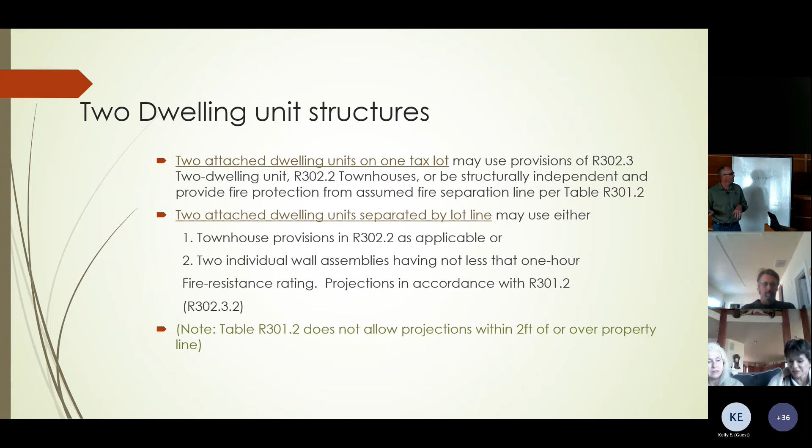So 3 or more units that are attached. The only way you're going to stay in the residential code with that is to do townhouses. Once you get to 3 attached units, that pushes you into commercial code. So in townhouses, you can go as many as you want. You just have to meet the provisions of R302.2 about vertical separation and separation of utilities and things like that we'll talk about a little bit later.

For that, so 4 or more units. This is the only thing that comes into play on that is that you'll have to do accessibility requirements, and that doesn't really matter if you're in the commercial code or the residential. If you have 4 or more attached, the residential will push you to the commercial for the accessibility. You've probably seen some houses being built that are like 4 townhouses in a row, and they're not meeting accessibility, and that's because one of the exceptions is if it's 2-story, that they don't have to meet accessibility. So that covers that.

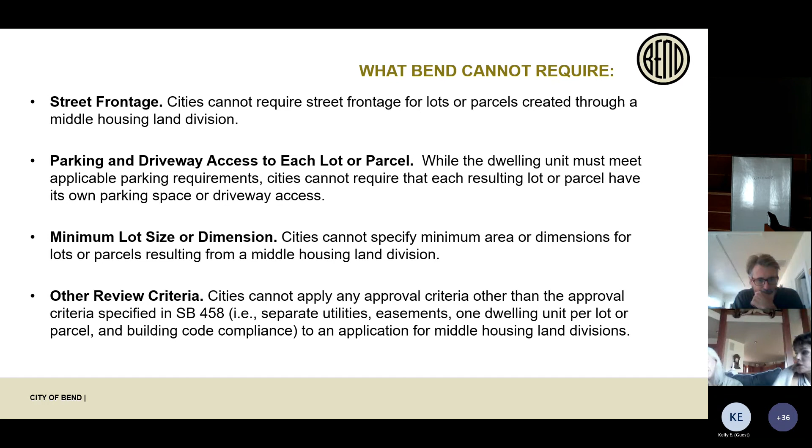One thing I just want to bring to your attention, I've been working with Brad, Jay, and Joe on this. So when you come in for the Senate Bill 458 application, you have to demonstrate that the building meets all applicable Oregon Residential Specialty Code and building codes. We originally put in that it had to be prepared by a design professional licensed in the state of Oregon to submit this letter. In a lot of cases, it doesn't need to be provided by that design professional.

Sure. Yep. Oh, so go back 1, and it's yours, Brad. Thank you, Pauline. Is that my next slide? Yep. Okay. Right.

So the very beginning of 302 talks about the fire resistant construction. That's kind of the basis of this presentation. So there is a table that tells you that you have to be 3 feet from the fire separation line. And that fire separation line can either be an actual lot line or it can be a chosen one, whatever works best for a project.

Jumping all over. So let me see, I'll just read what it says. Where multiple detached dwellings are located on a single lot, each detached dwelling shall independently comply with 302.1. So that's just part of the slides that I'll show later.

You can have a big lot with a bunch of different dwellings on it, and they get looked at individually for building code. For planning code, you have a certain number of lots or a certain number of buildings you can put on that lot. But for us, we look at each individual structure. So if it's attached, then you count up the number of dwelling units, and that will drive you to what code you have to go to.

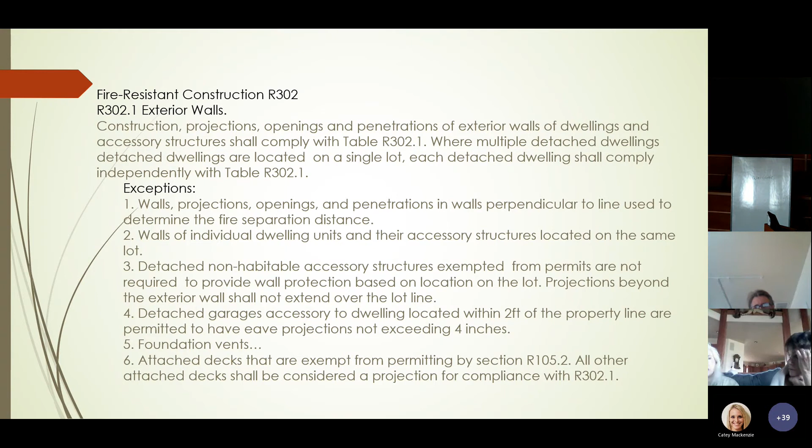Okay. So next one. So this is table R302.1. If you look over on the far right there, fire separation distance provided. People will confuse this with how far it is between structures, and that's not what it is. It's how far it is to the fire separation distance line. There's a definition coming later of what that is.

But if you are less than 3 feet from that, and that's typically going to be a line between 2 structures. So to not have to have any fire rating, you need to be 6 feet away from each other, because that line is going to be in the middle of the 2. So if you're less than 3 feet to that line that you determine, then you need a 1-hour wall. And same with openings, and an opening is your doors, windows, vents, all those things in the wall. It says not allowed less than 3 feet.

So penetration, same thing, not allowed less than 3 feet, or it needs to comply, which is going to be fire stopping or a fire assembly. And projections, this one is a pretty common one that we run into. If you're going off of this table, which is basically everything other than a townhouse, as close as you can get to that line is 2 feet. You're not supposed to project anything closer than that.

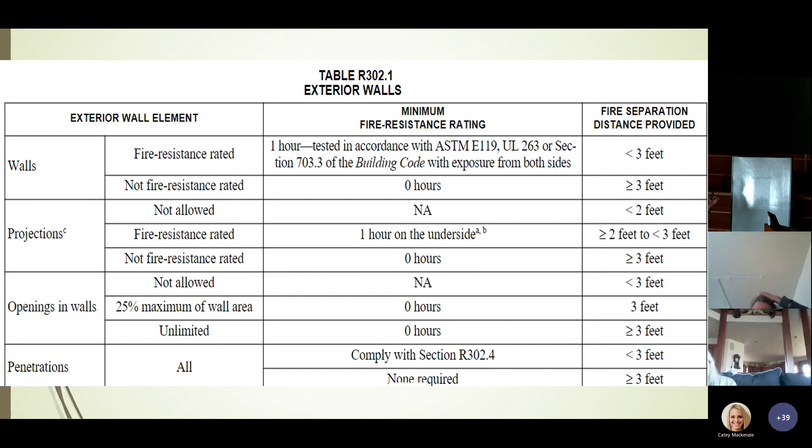The new code did specify that decks that are over 30 inches above grade are also considered projections. So this is something you might run into if you have a 5-foot setback from the property line, and you build a 3-foot wide stairway deck on the side of the building going down. That's going to now be within 3 feet of the property line. So it would need to be fire rated.

Well, no, if you build it 3 feet wide and you have a 5-foot setback, you're at the 2-foot line, so you should be fine. But if you're doing a 3-foot setback, which the new code will allow, then you're going to be right up to the property line with a deck. So that would need to be 1-hour rated, which is like heavy timber or I think non-combustible and a 1-hour firewall inside of it.

If it's below 30 inches, it falls under the exemption of just being a landing outside. The exception says that it's not considered a projection. So then you could go right up to the property line with a deck that's a foot or 2 off the ground.

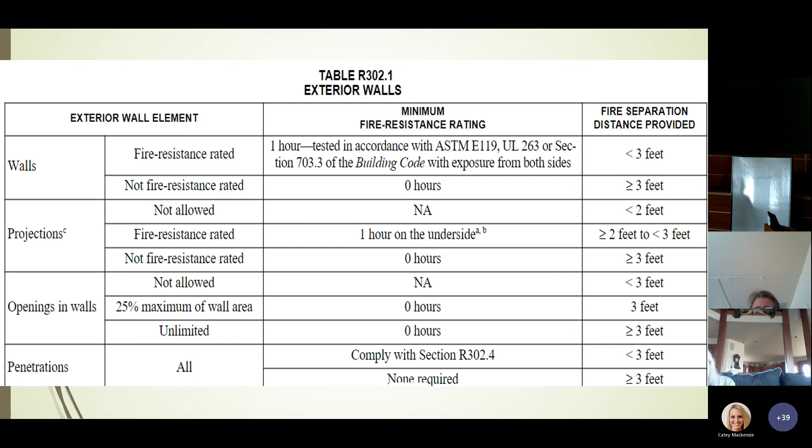Oh, you got it. So fire separation distance, that was the column at the end that I was talking about. The code definition in Chapter 2 of the residential code gives you these three options for what that distance is. It's either to the lot line, which will be if you're doing 458, you're drawing a new lot line at some point, so it's to that line. Or to the center line of the street, alley, or public way, which usually doesn't come into effect much with fire rating for the building department; front setbacks to streets are more a planning code issue.

And then the third one that we see a lot is the imaginary line between two buildings on a lot. But it's really between all detached buildings on the lot. You need to determine where you want this imaginary line. So if you have two buildings that are 3 foot away from each other, you can put that line right on the face of one of the buildings, and that one just has to be fire rated. And then the other one is now 3 feet away, so it can meet the normal code of having an eave and not being fire rated.

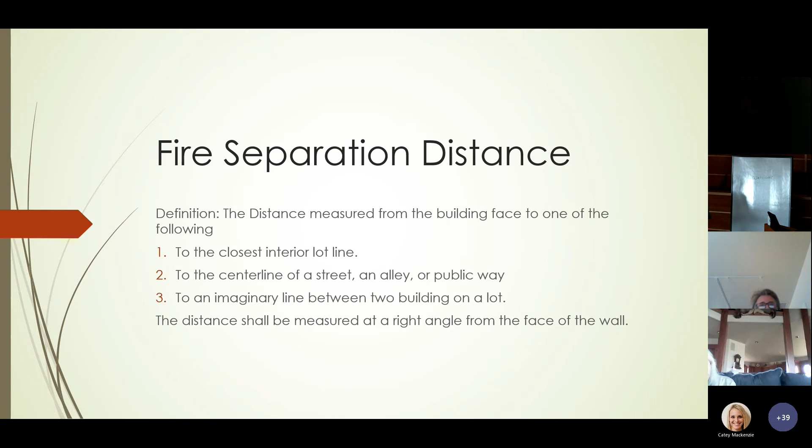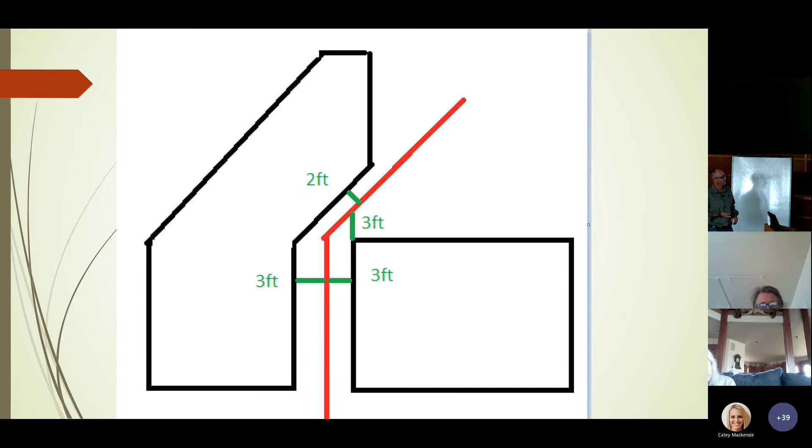So in this picture, you can see that this building is 3 feet from that line, so it doesn't need to be fire rated. This wall is 3 feet, so it doesn't need to be fire rated, but this one is 2 foot, so it would need to be a 1 hour wall, and it can't have any projections. Actually, on the 3 foot, the eaves can go in. That's what I mean by the projections.

Yeah, so if you're at 3 feet, then you can go within 2 foot of the fire separation distance. So that gives you 1 foot of eave. Yeah, if you had a 4 foot setback, you could go 2 foot eave. Basically, house with 1 foot eave, house with 4 feet. 1 foot. Yeah. Right. Yeah.

Okay, so this was just kind of my picture, and we actually just had something very similar to this submitted, which is kind of becoming an infrastructure question of how to do the inspections and whatnot, because you have to get utilities to each of these buildings without crossing each other. But if this is one tax lot, building is going to look at each of those structures individually. So I don't know if I say anything else.

Yeah. So we look at each building's fire separation distance to the other buildings. So a person could do that many duplexes, like if those are duplexes, all those buildings could still stay in the residential code even if it's on one lot. This is the flyer, the handout that's on the table if anybody wants, but it was meant to be just kind of a quick reference of what you can do.

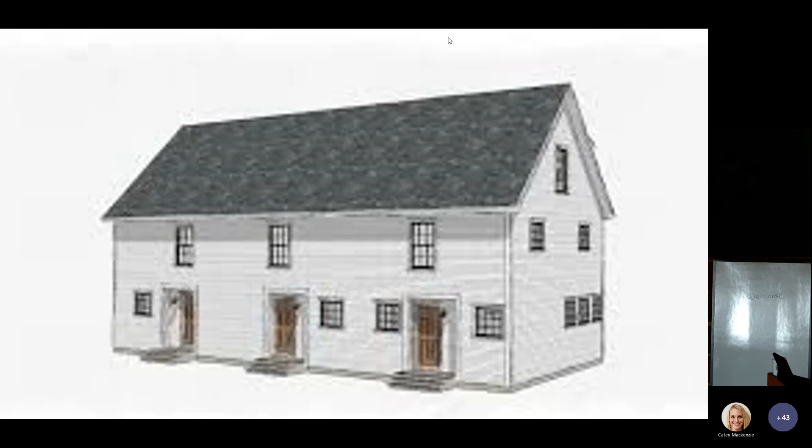So you can do a townhouse because they're connected, and the townhouse code allows you to have 12-inch eaves. And the 12-inch eaves can project over the property line too. So in this situation, if there's no property line here, this is just a duplex, and all those eaves don't matter.

So we did make a determination that in this kind of case, that little corridor you see in there, if those walls are within 6 feet of each other, we want to call that 1 hour walls. Because the intent of the code is that you don't have windows and stuff looking right at each other and fire being able to jump through there with no firewall. So hope that's somewhat clear.

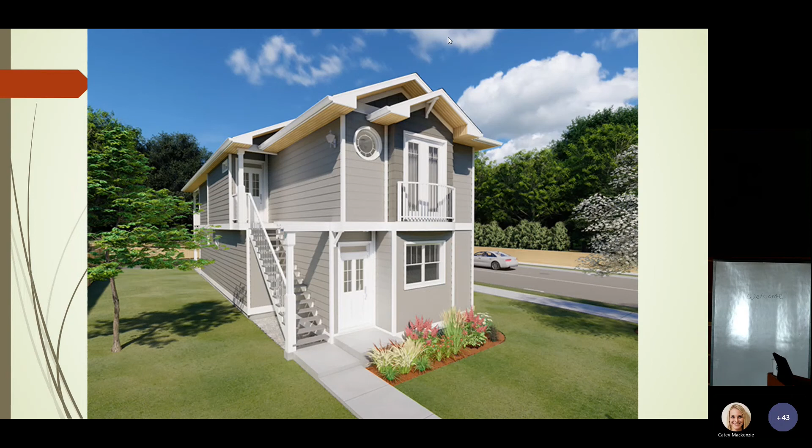Next one. Okay, so this is one dwelling unit above another dwelling unit. So what happens in this case is you can't use townhouse code because it needs to be vertical. And it's not 458 eligible because you're not going to be able to get one dwelling unit on the property line in this case, since they're on top of each other. So the only way to do this one is duplex. And a duplex requires a 1 hour floor ceiling assembly, and then all supporting walls of that assembly also need to be 1 hour.

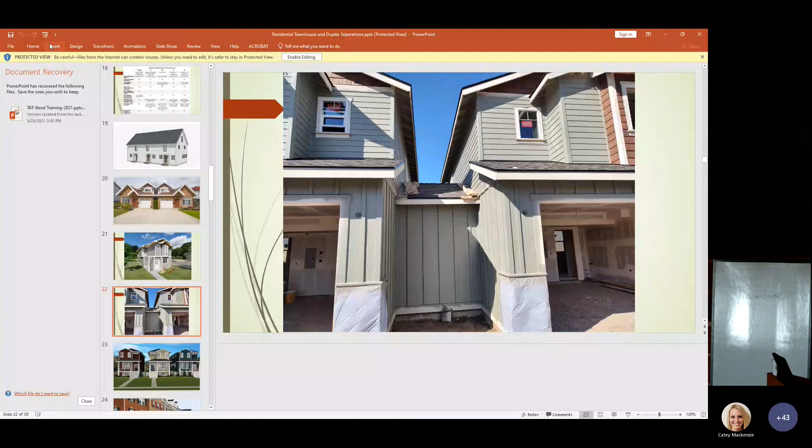And you get windows on the... Great. Got one more question. If you didn't hear that, what he said was, since those walls are 6 foot apart from each other up there, you can have windows all along and have as many openings and things and no rated protections and all that.

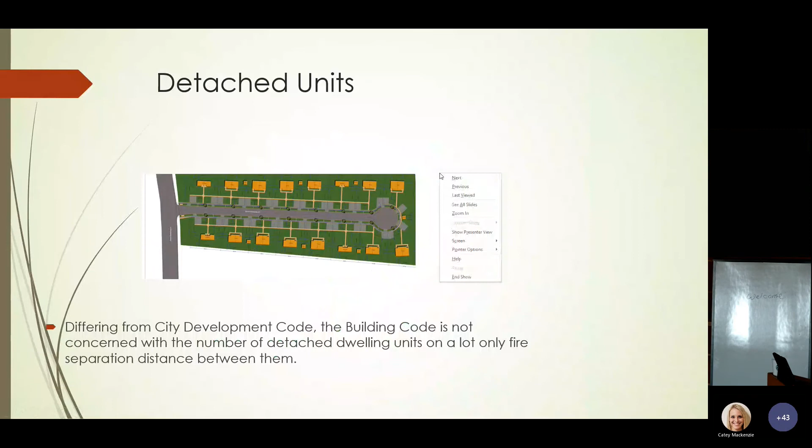Sure. Go back on the slide. I don't want to get off topic, but on the left side of this wall. This little guy here? No, you don't. So there's a definition in there of extending to the exterior wall for duplexes for two unit separation.

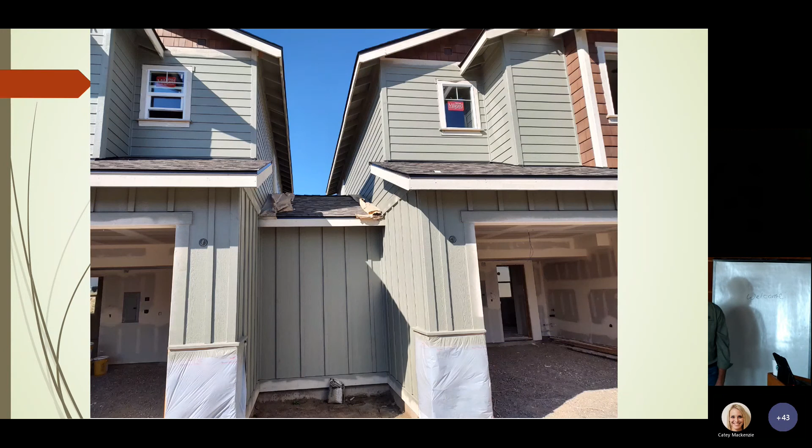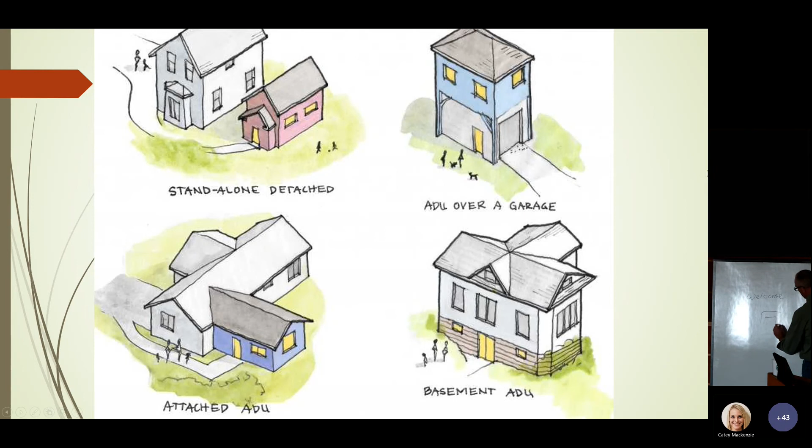So if you had a garage and you've got an ADU above, you're saying, or you just draw it sideways. Figure out that. So this is the garage. There's a door. And this is all one unit. And then there's a unit here. So this is one, and this is two. And so this unit, you get into it from outside. And in this unit, you come into your garage, you go into your house, you walk up into your bedroom. So then all of this has to be rated, right?

Like those. Is this 1 story? It's 2 stories. Okay. Oh, this is the face view of... This is the side, yeah. Okay. Gotcha. Yeah. I'm trying to get some specific questions. It's much easier in this. That? Okay. Yeah, there's a door there or something.

So you need a garage dwelling separation, which is just gypsum on both sides. The ADU, I guess you're getting to it from the outside. So you need a 1 hour wall here between the dwelling, and you also need a 1 hour wall there, or 1 hour floor ceiling assembly. And then the walls supporting that need to be 1 hour rated. Put a door, ADU, second floor between ADU and the dwelling, you can put a door. Yes.

If we run out of questions, I can go back to the presentation. Oh, we lost the whole thing. Do we want to take a break? Yeah, let's take a 10-minute break just to get the thing going again, and we'll see you in a few. All right, hopefully everybody online can hear us. We were getting some online questions too. I think I'd like to keep doing the presentation until 11, and then leave the last hour for questions and online questions. So I will start this up again. We're not taking questions, so Pauline doesn't have to be here.

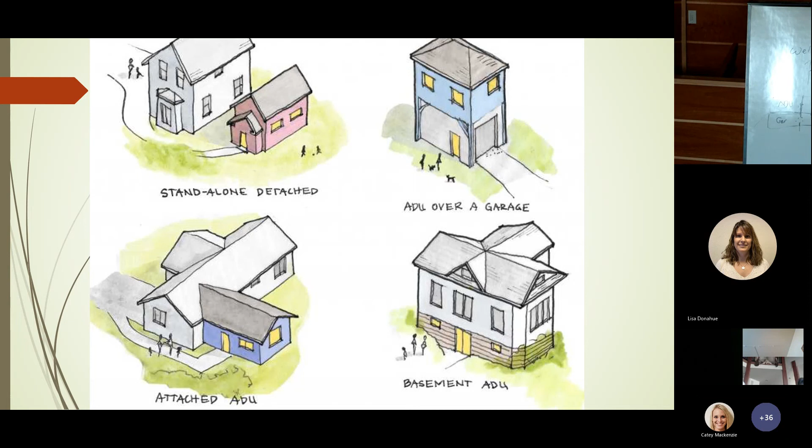Two-family dwelling separations, which also apply to ADUs and duplexes, if the ADU is attached. What it says a two-family dwelling needs is a 1-hour wall, tested under those 3 different options of approvals for that type of wall.

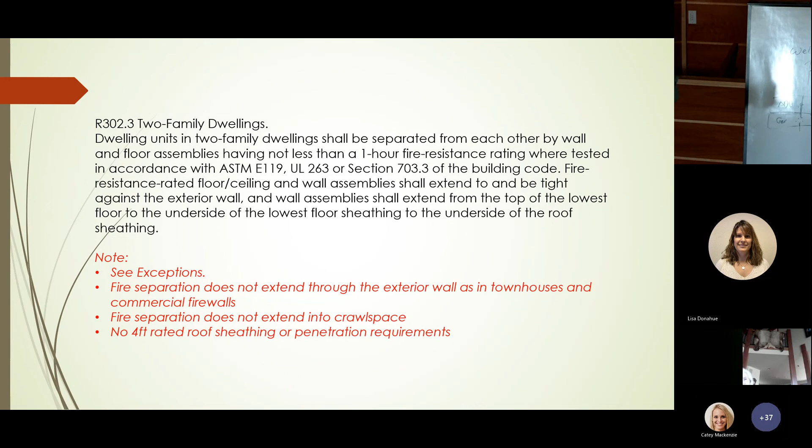And there are no wrap back requirements on 2 family dwellings, and these are in townhouses. On the walls, that's commercial code typically. By wrap back, I mean the wall perpendicular to the property line doesn't have any requirements on it. And no 4-foot rated sheathing. That's what you'll see in commercial code and in townhouses: the no penetrations and the fire rated sheathing for 4 feet back from the property line.

So this is a typical 2 family dwelling unit separation. The red line is the 1 hour rating. And you'll see that it doesn't go through the crawl space. This is the definition from 2 slides back. It says that the 1 hour separation between the dwelling units needs to extend from the lowest floor to the roof sheathing. So in this situation, I tried to draw a post and beam floor, so you wouldn't need to continue that down and have a footing and all that on a 2 family dwelling ADU situation.

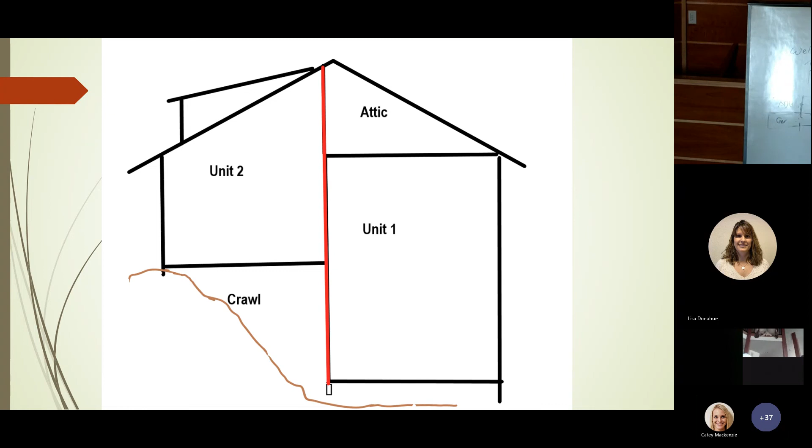And then the crawl space wall doesn't need to be rated, if that makes sense. And then the attic wall. So unit 2, between itself and the attic of unit 1, still needs the 1 hour wall. These are the two exceptions to the 1 hour walls. Exception 1 is fire sprinkler, that you can knock it down to a half-hour rated wall. Exception 2 says if you have a layer of 5/8 gypsum across the whole top floor, all you need between them is draft stop in the attic.

And I actually, just putting this presentation together, realized they changed the draft stopping requirements in this last code. Now it's down to only 2 options, which is plywood or gypsum. It does say or equivalent, but they used to spec out a whole bunch of things like mineral wool insulation, and I think metal, but now they just say those 2. So this is that situation. Again, it doesn't have to go through the crawl space.

The wall between the 2 still needs to be a 1 hour wall, but now all you need on that lid is 5/8 type X gypsum. The arrows are going to start popping up as you go forward. So the next one, that lid just needs to be 5/8 type X gypsum, and then the next one is the draft stopping. I don't have it in front of me. I think it's 3/8 gypsum or 1/2 inch plywood, or it might be the reverse of that. But if you stick with 1/2 inch, either gyp or plywood, that meets it.

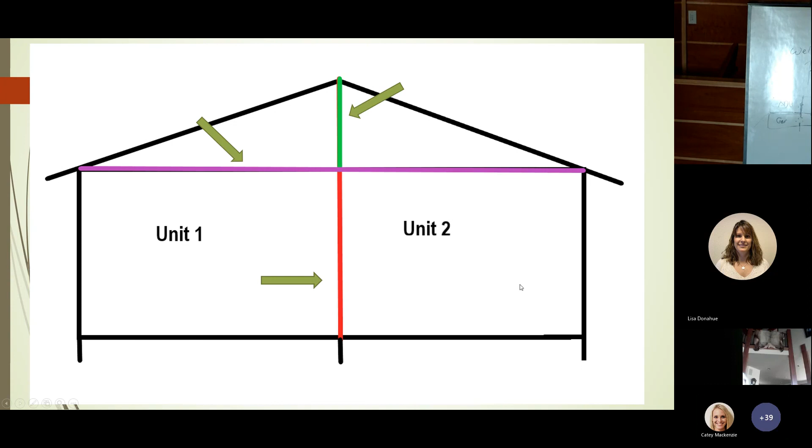So supporting construction, this is the next section. So if the separation is a stacked unit and you have a 1 hour floor ceiling assembly, then the supporting structure can't be any less than the 1 hour. And there's some question as to, like if it's an exterior wall that's not the bearing wall, but that's still supporting that diaphragm. So if it's an interior non-bearing wall down below, like if you had garages separated with a non-bearing wall in between them, that doesn't need to be 1 hour rated.

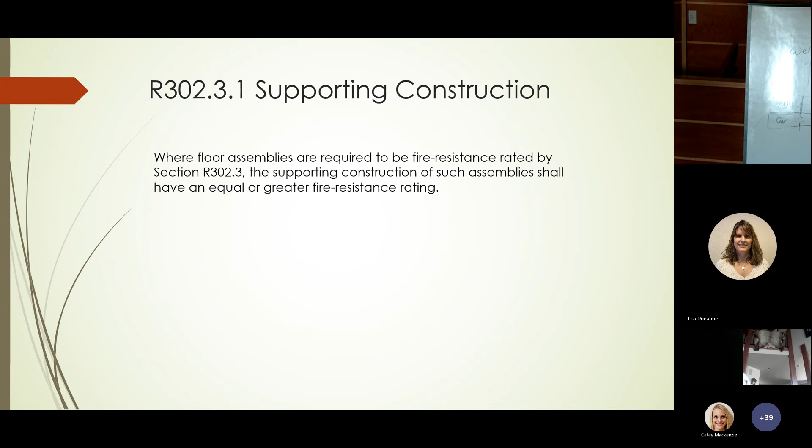So this is section 302.6, which talks about the separation between the garage and the dwelling, which is very confusing to people that have a garage and are putting the ADU above. The ADU kind of supersedes this section, which just says that you need 5/8 on the lid if there's habitable space above the garage. So I don't think we're going to worry about having it on the lid if you have that 1 hour separation from the dwelling above.

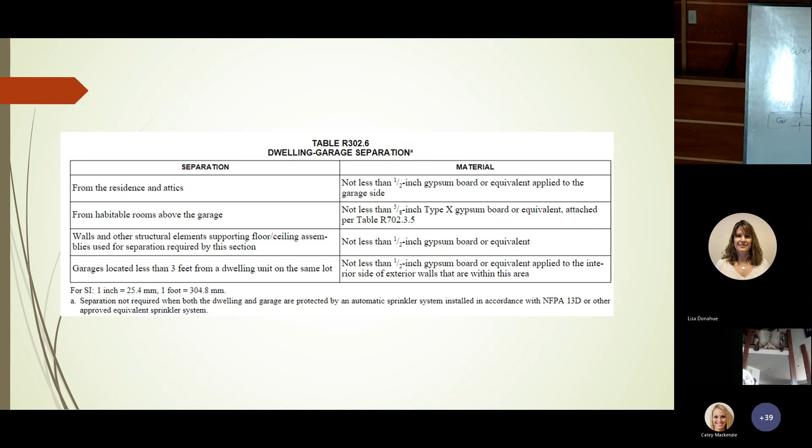So townhouse separations. We can go to the next slide. So there are 4 types of firewalls allowed to separate townhouses. The two 1-hour fire resistant walls are two distinct firewalls, which typically is going to be 4 layers of gypsum with 2 stud walls. And to build that, you usually lay it down and have the inspection come out and see the inside layers built, and then they'll tip that up and build the house, do all the MEPs and the other parts of the construction, and then do the other firewall side.

So it tends to be a slower process, and there are penetration requirements, well, I don't think they're as bad for that one, but we just don't see this type of firewall as often in townhouses these days because of the construction feasibility of it.

A modified 2-hour firewall, this is the wall that's shared by both sides of the townhouse. It's not structurally independent. And they say plumbing's not allowed, but then in a later section of this code, they did clear it up and said, unless you use the provisions of 302.4.2.1, where you're framing out the plumbing in the wall with another layer of gypsum. So it kind of fire blocks it. Oh, that's what I was going to talk about.

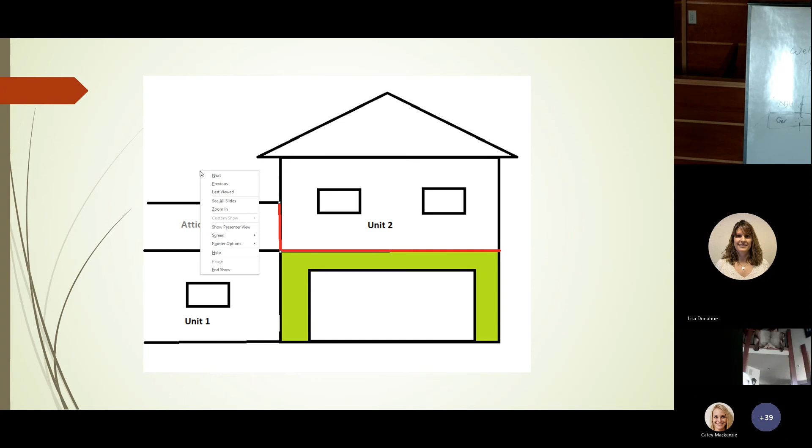But if you have these bigger houses that do open web trusses, they may have a communicating space in the floor cavity that's over 1,000 square feet, and then you'll need draft stopping in there. But it's not as restrictive as fire blocking. So, thank you. We can go to the next one.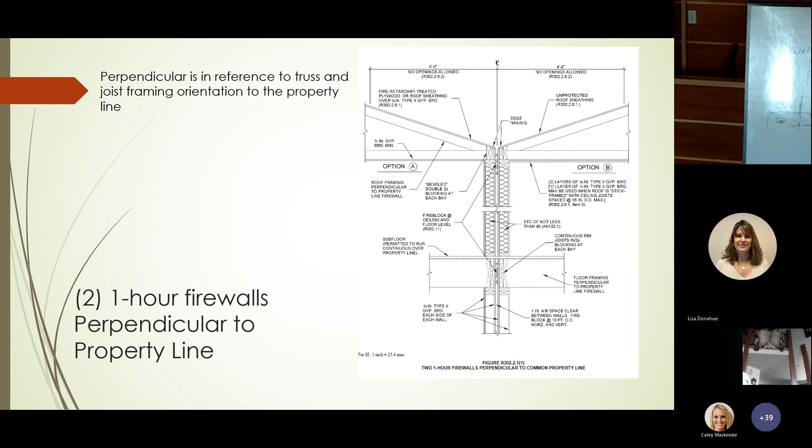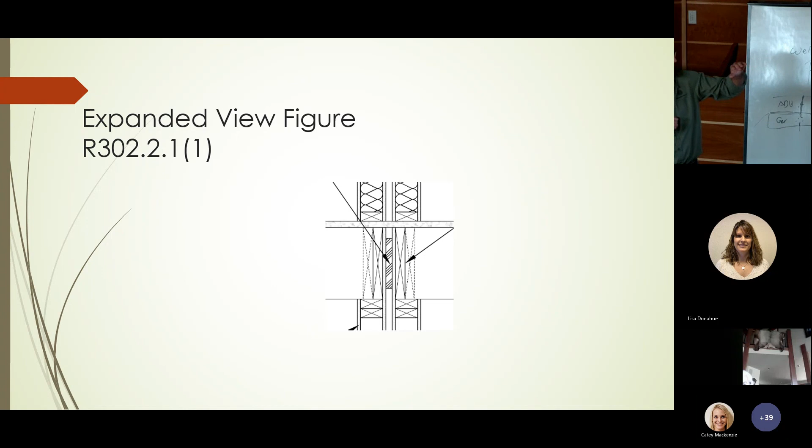Yeah. So you can see the 2 layers of gyp running up the inside face there. You are allowed to go across the top of it with plywood. And then they show fire blocking in there, but if you went across the top of it with plywood, you wouldn't have to do that. So next slide.

Oh, this is the parallel. So now the trusses and joists are parallel to the property line. Same thing, it's 2 1-hour walls. You can see how the firewall goes up through the attic there. There's 4 layers total of 5/8 gyp.

I did ask the state about this. That's why I redlined the slide, because they messed up and said it was 1/2 inch, and that didn't really make sense. So I asked them what the intent was there, and they said they're going to come out with an addendum that's 5/8. So basically, there's 4 layers of 5/8 in the wall framing, and the same thing in the attic.

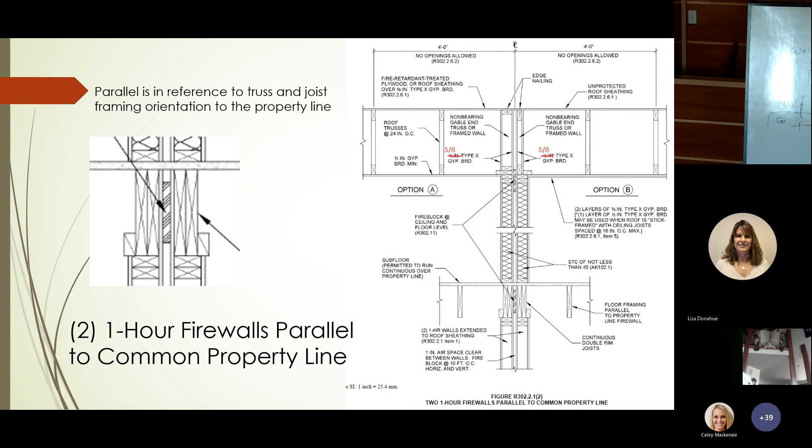And then the blow up there of the floor framing, I think that's the same. It's 2 layers of 5/8 on the inside, and then 4 blocks total. So that gets you 2 1-hour walls, basically. Next one. I should talk about the fire rated sheathing too. It's the same on this one as the other 2.

So if you look at the top there, the one on the left says no openings allowed, fire retardant sheathing, and that's for the first 4 feet measured that way. So it's not technically 4 foot of plywood, which we do see, but people don't typically build with the truss perpendicular anyways. The 4 foot is measured from the property line, not along the sheathing of the roof. So the left one, option A, is fire retardant sheathing and no openings for the first 4 feet, and the lid of the ceiling is just regular 1/2 inch gyp.

The other option is to go 2 layers of 5/8 across the whole lid of the building, and then you don't have to have fire rated sheathing, but still no openings allowed in that first 4 feet.

And then also this is the modified 2-hour wall. So that's the other type of wall. And on this one, you can see that, and this one is pretty popular, but it is a lot more difficult to build. And the reason why is they always put the gypsum on last on this, after everything's framed, and it makes it difficult to extend it through the floor framing.

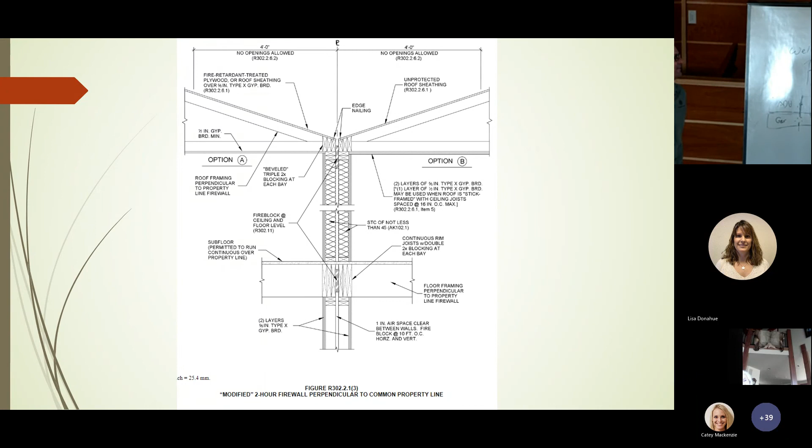Oh, this is the 6 layers, and since they don't have the gypsum layer running up the inside like the two 1-hour firewalls, and the fact that the fire rating comes from those 2 on the exterior, you don't have that inside the stud bay. So you could, in this situation, frame up a stud wall, a small cripple wall, and then put 2 layers, which would be just kind of extending your firewall up through, or you're going to need to do 3 layers on each side of solid blocking.

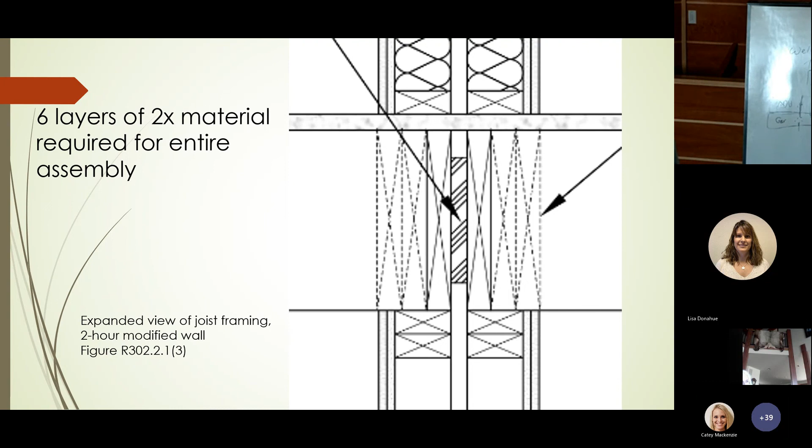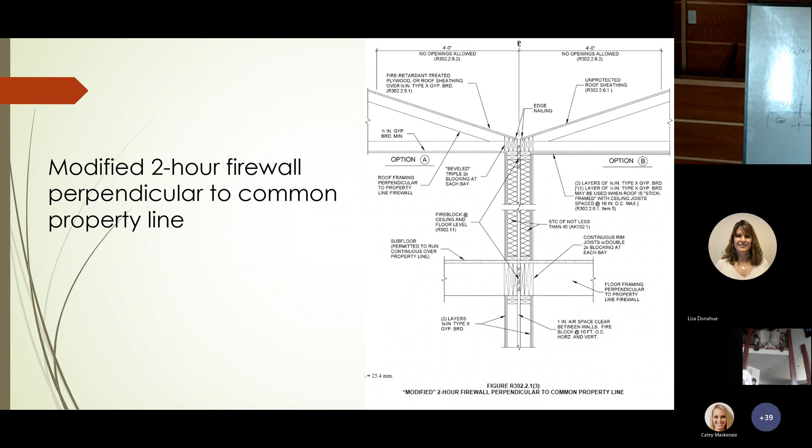Next one. This is, it's the same, isn't it? Perpendicular. Now let's go to the next one. Yeah, here we go. Parallel. So this one's pretty common. This one you can see where the 2 layers go up through the attic on each side. No requirements on the lid if you're using option A.

You can still use the same option B of doing the whole lid of that story in 2 layers of 5/8 gyp, and then you don't have to have fire rated roof sheathing. And same thing, no openings allowed. So that's going to be your roof jacks, your ridge vent. That's the one we see all the time is ridge vent. You're ridge venting a house, so you do it all the way across, but you can't do it within 4 feet because that's an opening in the roof.

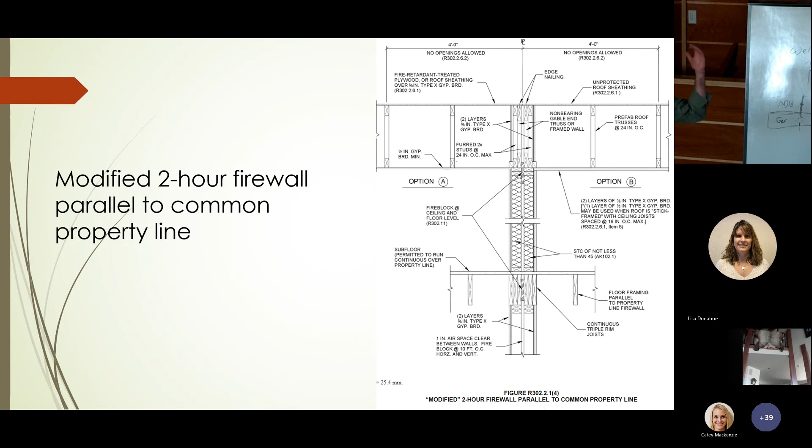The one thing to consider, especially if you're going to jam townhouses close together and then use ridge vent, is that you're probably not going to get enough ventilation because you have to cut it off 4 feet from the walls. So you're going to want like eave vents and possibly mushroom vents or something up near the top to get the required ventilation.

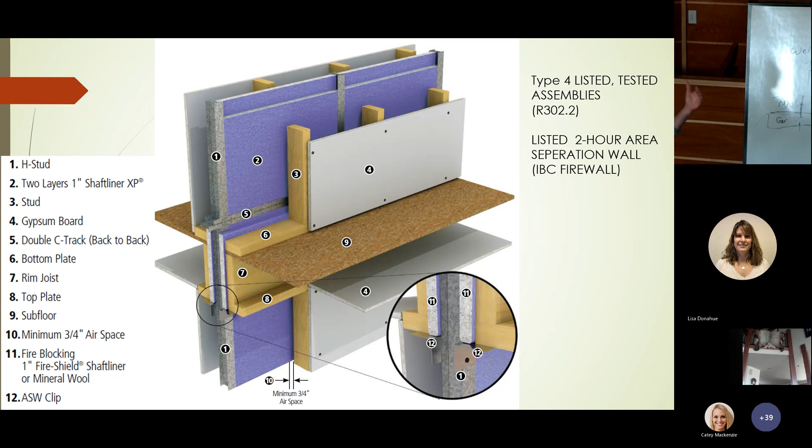But once you get it down, I think it goes a lot faster because it doesn't have the issues of the inspector coming in and saying, oh, you penetrated all this and this, you need to double up this and all these fire requirements. So

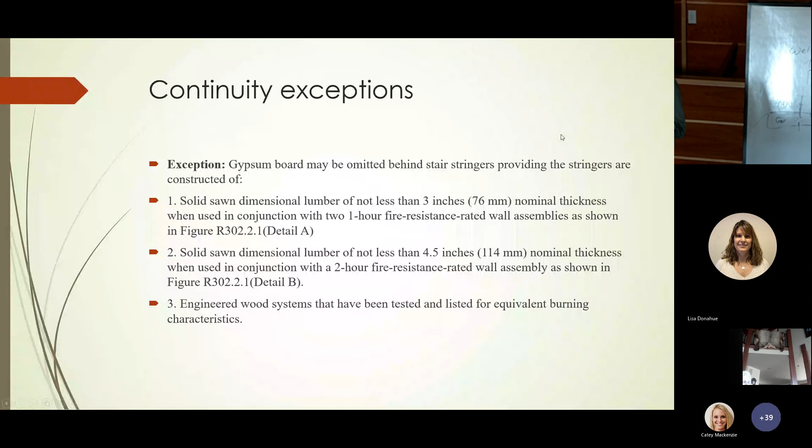So yeah, it's 11 o'clock. I don't think I want to get into this one. We could talk for hours about this. So I think we'll open it up to questions. So yeah, that sounds good.

Okay, so Karen asked, can accessory structures, not ADUs, be allowed on a middle land division lot? Yes, I think so. Like a garage or a shed. If they're permittable, does it come into the lot coverage requirements? You would look at lot coverage when you look at the middle housing on the parent site in the beginning. But like, are accessory structures included in lot coverage?

Yes. And one thing to know about, not to dive too much into Senate Bill 458, but let's use a quadplex for an example. You go put the quadplex on the lot and then you go through the land division. So now each unit's on their own lot. In the future, if one of those homeowners wants to add on to their unit or put a new accessory structure like another garage or something, you look at lot coverage for all 4 units together.

So you will always go back to the original middle housing that's on there and look at lot coverage that way. So let's say property owner number 4 comes in and they add on and they max out that lot coverage for the entire parent site. Property owner number 3 can never come in and add on to their house because the quadplex is now at the maximum. And that is from the state.